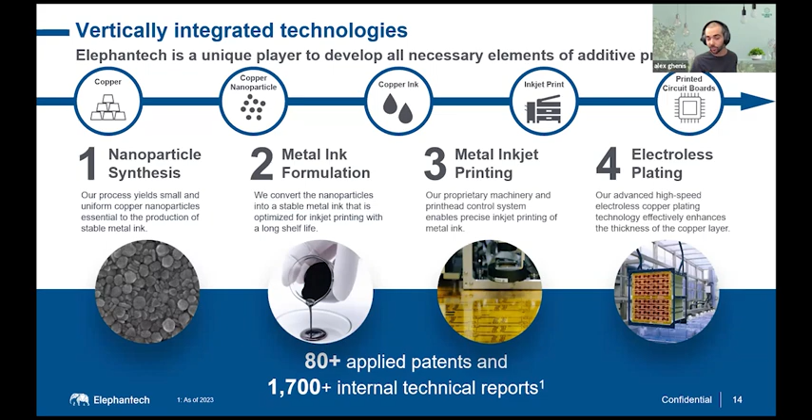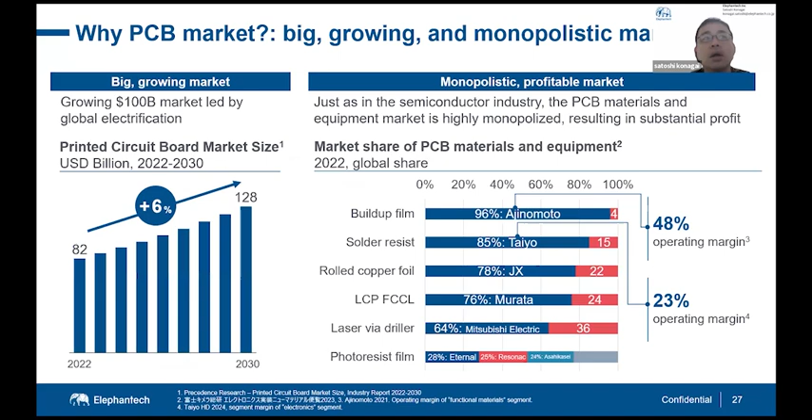It's very needed. I want to go to a second question, which is, what kinds of applications are you targeting with the rigid PCBs? Yeah, great question. Let me see if there is some good detail. Hold on, sorry, I couldn't find the right one. Ah, yeah, here you go.

Basically, laptops and TVs are among the biggest consumers of rigid printed circuits, and also car electronics. Those are the three main products using RPCBs. But rigid printed circuits have very diversified applications; almost all electrified devices use PCBs. That's the current situation. But if we take specific products, it's TVs, appliances, car electronics, and PCs.

And if I remember right, the flexible ones can be used in new curved monitors? Right. The majority of flexible ones are used for smartphones, but other industries use them too, for example PCs, for the connection between the LCD panel and the actual board, or the LED backlight module. Even the car industry uses flexible printed circuits for the headlamp, switches, handles, the gearbox, and sensors as well. So there's a variety of usage for flexible printed circuits.

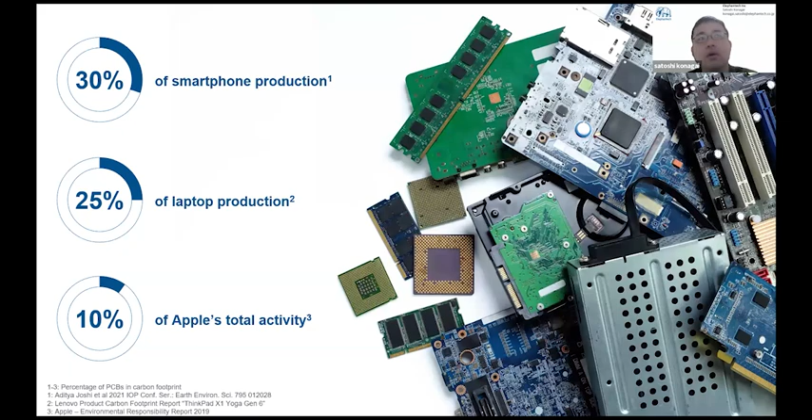So with your product, what are some of the quantifiable environmental benefits of using, say, the pure additive process compared to traditional methods? Thank you. So these are statistics using LCA calculation for our flexible printed circuit. For the carbon footprint, it's around a 75% reduction that can possibly be done. For the rigid one, numbers will be a little bit smaller, but we are expecting 50 to 60% reduction. But we are still in the R&D phase, so we cannot guarantee the actual number.

But theoretically speaking, there is no removal process at all. So intuitively there is limited raw material waste, and that leads to a direct impact on carbon footprint reduction. And I see the water usage is also huge when that goes down. Exactly. Because the process is very short, that is the reason why. And also we don't have any chemical processes besides plating.

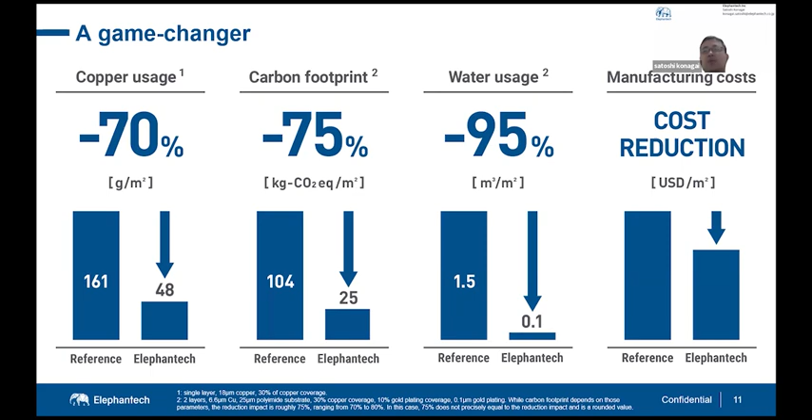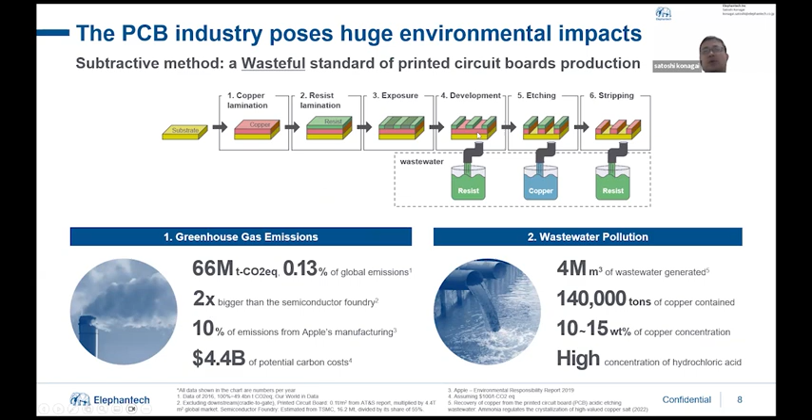For the conventional methodology, there are a lot of chemical processes, for example development, etching, and stripping, and all the processes in between are necessary for washing. So here is a more detailed slide. The left-hand side is the subtractive method, which is the conventional method, and the right-hand side is our methodology. The blue line is the one necessary for washing, and the purple one is chemical processes. As you can see, there's a lot of color for the subtractive method. On the other hand, the pure method has only a limited part for washing.

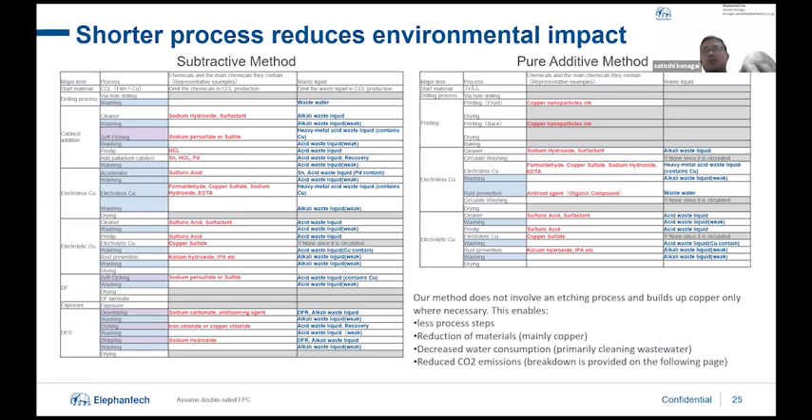Yes, I am passionate about water and conserving water supplies. Ah, yes, this is nice.

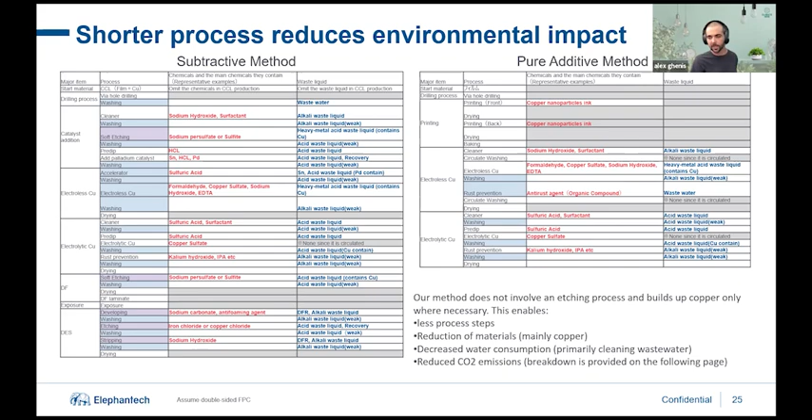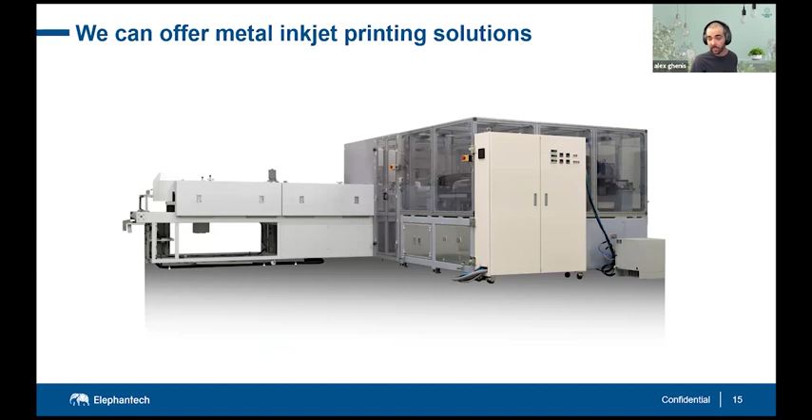This is huge. Obviously it's a very large printer that you were showing earlier, and a lot of the PCBs are relatively small in electronics, but are there any limits on the size of PCBs that you can create using this technology? Oh, that's a great question. Right now, it's limited. It's defined by the stage of the inkjet printer. On top of the stage, we are doing inkjet printing, so it's limited by the stage size. Right now our size is 500 times 830 millimeters.

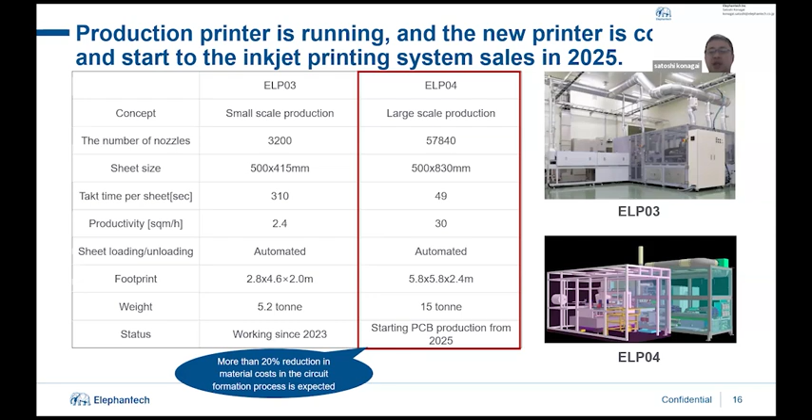But this stage can be expanded as well. If there is demand for larger PCBs, we can do it. For example, in the car industry right now, large flexible printed circuits are used for batteries, for sensing purposes. Sometimes their requirement is, let's say, 2 meters or even 3 meters. If there is some demand, we can certainly do it.

Because our printer uses component-by-component level development, we can expand the size of the stage and do customization. So if there is demand from the client side, we can certainly do it. That's the answer to your question. Great. So it sounds like you can meet a lot of different needs. Yeah, we can do custom needs and customization if there is strong demand.

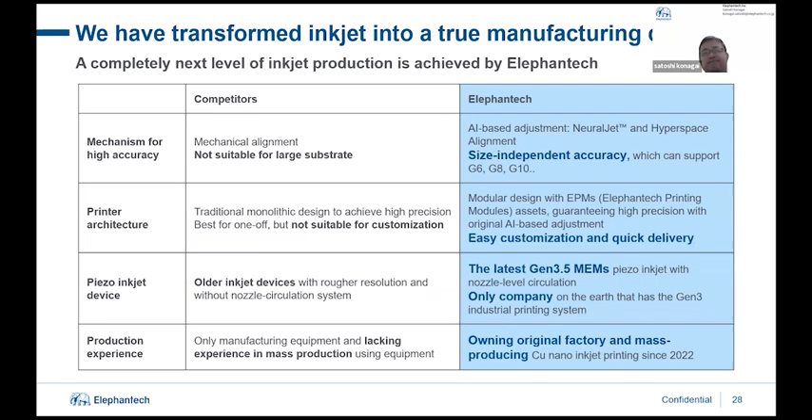And for what is already mass produced in Japan, that follows a sibling of the IPC standard, called the JPCA standard.

And then that's like a quality standard, almost equivalent to IPC, and we already have multiple experiences of it. And for the rigid printed circuit, it's almost the same methodology. So we are in the middle of the development.

Right now we are doing standard sample creation ourselves in order to pass all the performance tests standardized by IPC. And once we pass all the tested items, then we start calling for customers' actual designs to do more of a customization phase. So that's how we ensure quality, and we are following a conventional methodology standard.

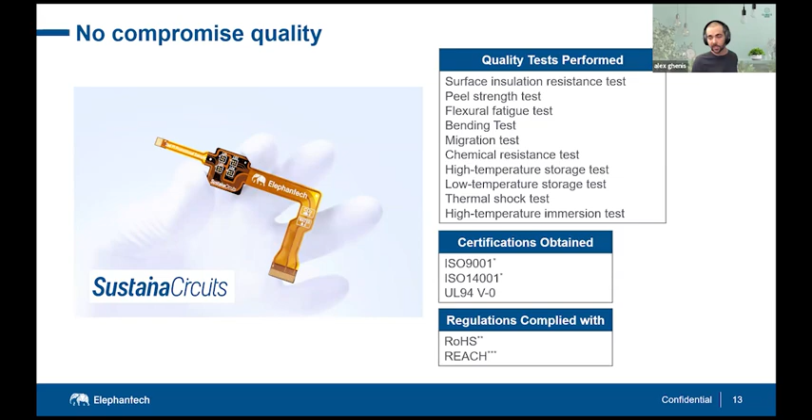Great. And I think one of the last questions here is just big vision for your company. What role does Elephantech see for itself in the future of sustainable electronics manufacturing? Yeah, that's a great question. So as of now, our business model is limited to component production manufacturing. But the reason why we started doing inkjet printing in-house development and also process development on our own is that we would like to spread our technology for the sake of humankind.

And that's why, after doing tangible R&D, we would like to do some partnership, even a partnership with a conventional PCB manufacturer who would like to implement our technology, so that we can meet more demand in the future. So we are considering pivoting our business more into equipment and materials sales rather than just electronic components.

One of the reasons why we started with electronic components is because we need credibility from end users with quality and also our technology level. Unlike other areas, electronic components require a very high level of quality and also maturity of technology. And it was very difficult for us to jump directly into equipment and material sales without electronic component production, which is proving our technology in the market.

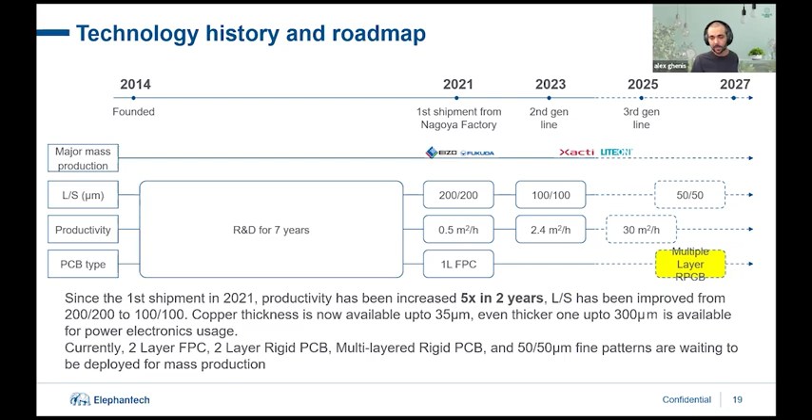Right, well, I just want to wish you all the best with expanding and growing in the market and really helping to improve the environmental sustainability of PCBs and all of our consumer electronics. Just a final question here: are there any key takeaways you'd like our attendees to get from today?

Okay. Yeah, thanks so much for your encouragement. So the key takeaway is that our technology is available. I think people usually think a PCB is a necessary component. People neglect the fact that PCBs are not sustainable, but there is no replacement technology at all. That's, I think, people's usual thought.

But I would like to say, hey, there is an alternative to the conventional methodology which is available already, and that can be used for various kinds of applications already, and that would be a silver bullet for future electronics.